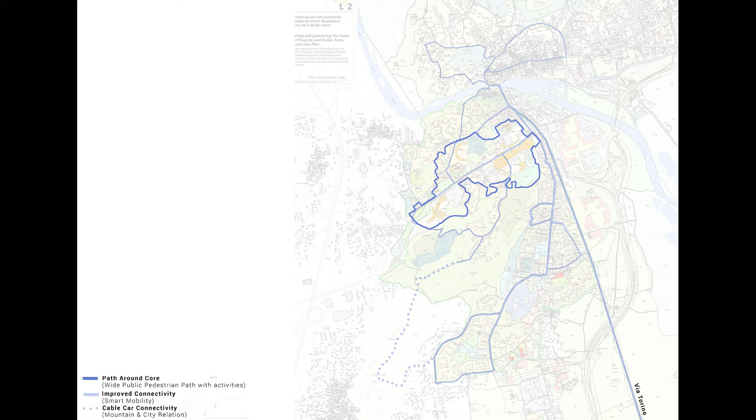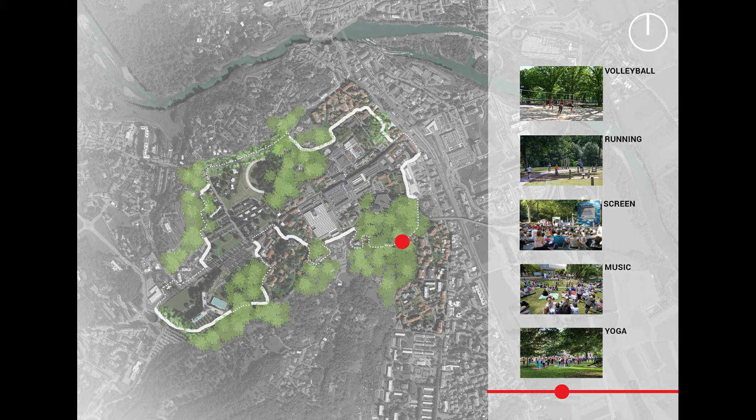Initially, the important and potential zones are selected, which are then connected with a special infrastructural loop, a smart mobility route. This enables easy access to all parts of Ivrea City. Then the relation of core zone and buffer zone was studied in order to explore its potential and instrumentalize it. Different public spaces are placed according to specific contexts along the boundary.

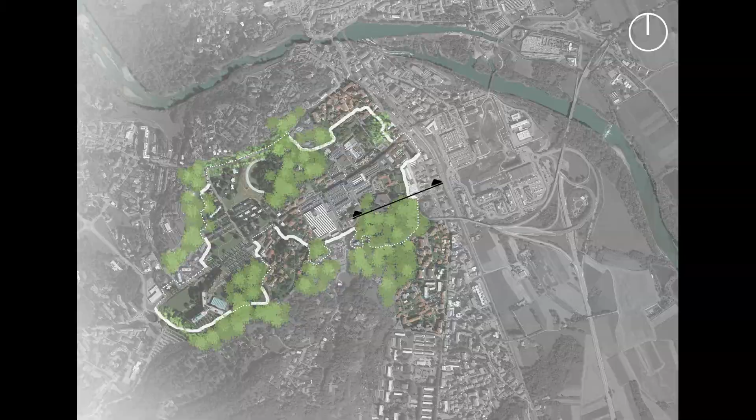We find some vacant public spaces that can be reactivated in order to provide more possibilities to connect people and heritage of different generations. We want to convert them and combine existing public spaces for a complete experience. Introducing diverse activities generates more interaction with the historical heritage.

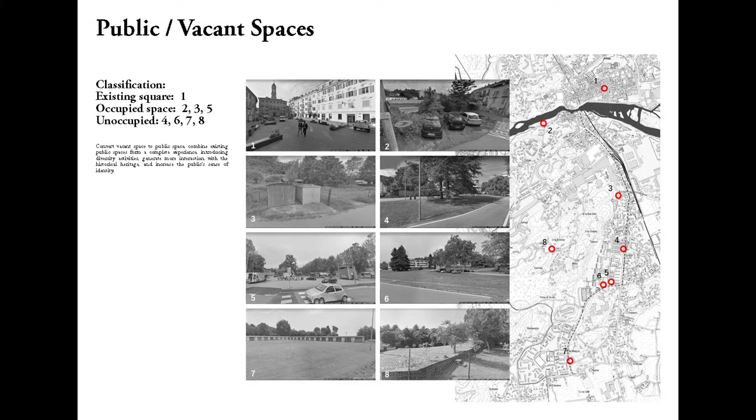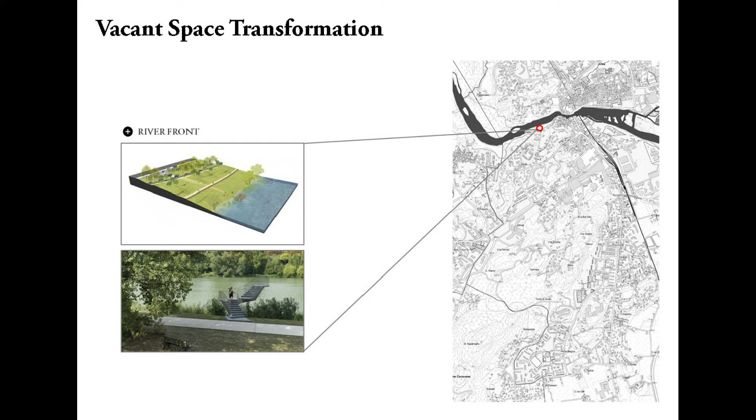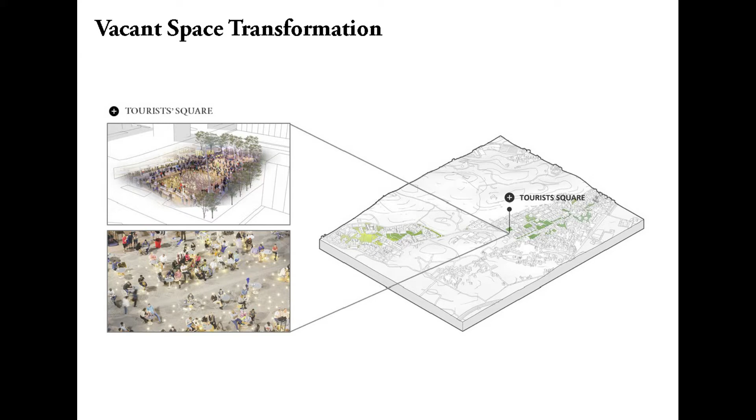This is our design for vacant spaces. The first is the redesign of the vacant space by the river, reorganized and designed into a riverside park. The second one is about a community square to meet the gathering needs of the community. The next is a tourist square, providing more leisure and entertainment space for possible growing tourists. Finally, according to the needs, we design a children's playground for local residents to improve the quality of their life.

The connectivity around different zones in Ivrea was enhanced with the help of smart mobility. Within the idea, walking is considered as elementary smart mobility, and thus given importance in the planning. Apart from that, organized paths are integrated into routes for smart mobility for easy flow. Separated pedestrian, cycle, and electric scooter paths are designed.

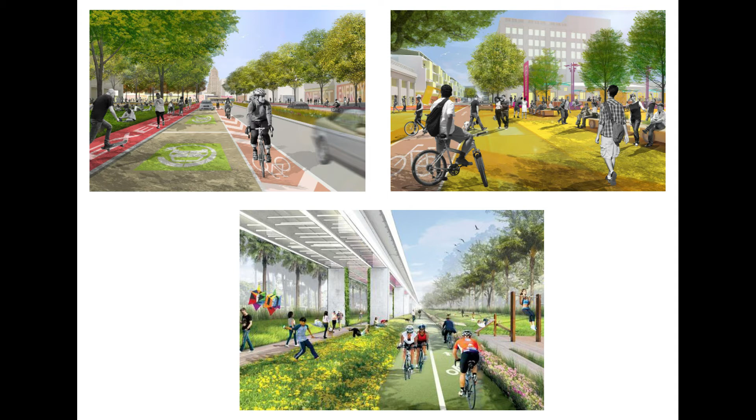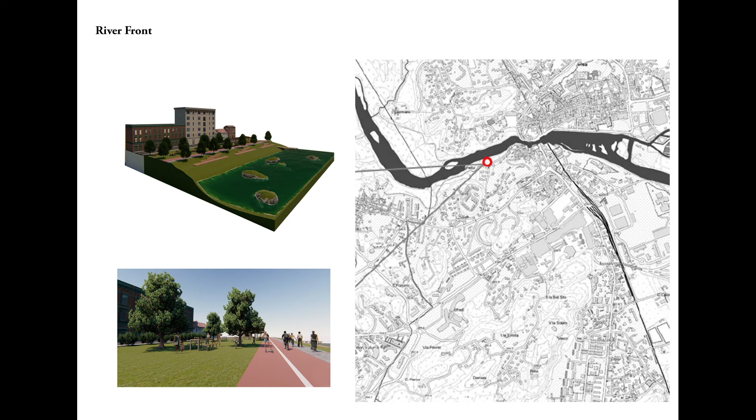In addition to this, the idea of modular furniture was included. The modular furniture is adjusted to the needs of events and public gatherings. All of the aforesaid interventions were intended to increase connectivity among the public in Ivrea.

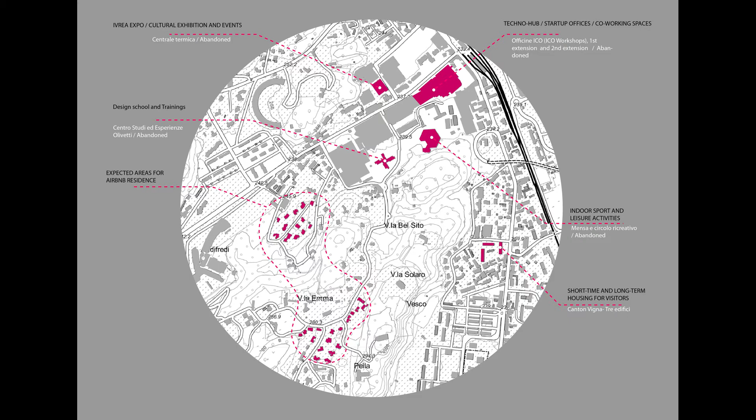Another fundamental aspect of the proposal is the reuse of existing buildings which are nominated as UNESCO Heritage and which are partly, or in many cases even entirely, abandoned nowadays. This map illustrates how these heritages are situated on the urban scale of the city of Ivrea, as well as demonstrating the actual use of the buildings, whether they are in use or abandoned.

La Fabbrica di Mattoni Rossi had a crucial role in beginning an industry that expanded itself, having four more extensions during the time. The intervention project keeps the same approach for this building by proposing it to be the home to various robotics labs, filmmaking, and sound recording studios. This tends to encourage young people to come up and realize their creative ideas in various fields.

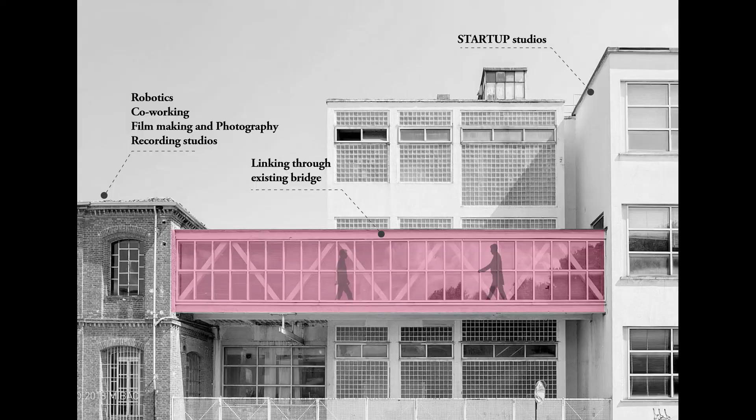First and second extensions of ICO offices remained abandoned in previous years and also now. Startup companies could have a very evident contribution for the community of Ivrea, serving as a global and local magnet for hosting new companies. Definitely, the collaboration between startup companies and Techno Hub will provide a long-term network of sharing skill between experts and the next generation.

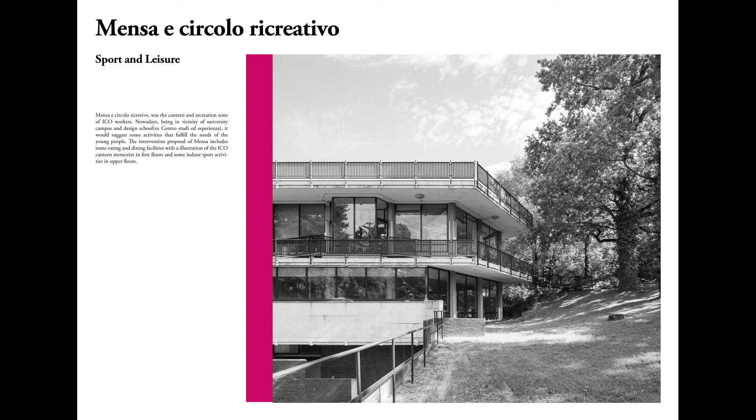Mensa e Circolo Ricreativo was the canteen and recreation zone of ICO workers. Nowadays, being in vicinity of university campus and design school, it will suggest some activities to fulfill the needs of young people. The intervention proposal of the Mensa includes some eating and dining facilities on the first floors and some indoor sport activities on the upper floors.

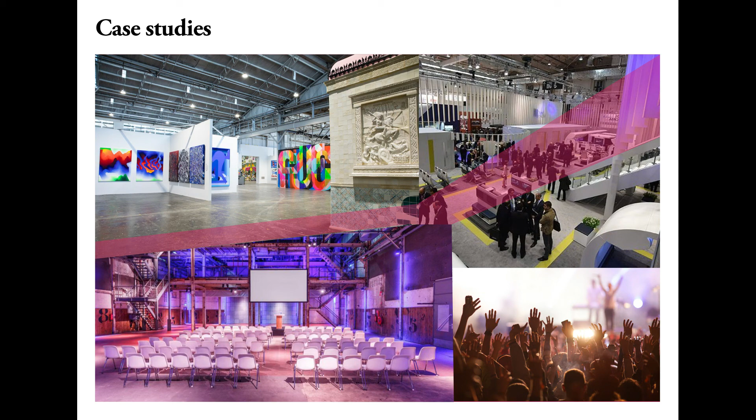Centrale Termica has been the energy center of the ICO office, which is now abandoned. The light is always ensured inside of the building, due to its glassy elevations. These features made the building suitable for exhibitions and cultural events. Implementation of curtain walls will make it possible to conduct also musical events and community-scale concerts.

Centro Studi ed Esperienze was the building dedicated to trainings for mechanical designers of ICO. It will be used as a design school connected to the university and Techno Hub to conduct different types of design courses and trainings.